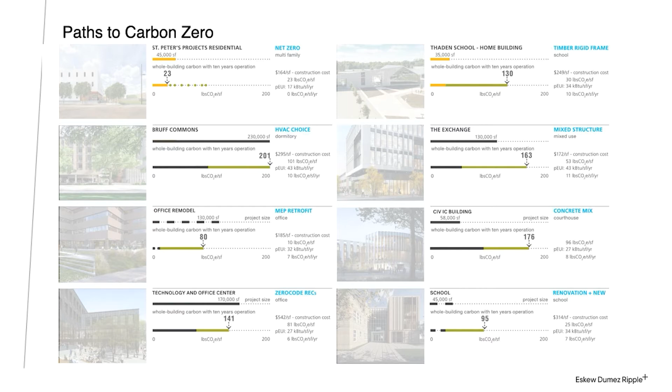So here at EskewDumezRipple, the Paths to Carbon Zero Research Fellowship had 2 tracks. One, measuring embodied carbon of a portfolio sample of our projects, and 2, seeing how much it would cost to meet the zero code standard in each of our projects. So we took a sample size representative of our portfolio of 8 projects across project types and locations and budgets to see what it would take to meet zero code and where we land on the embodied carbon scale.

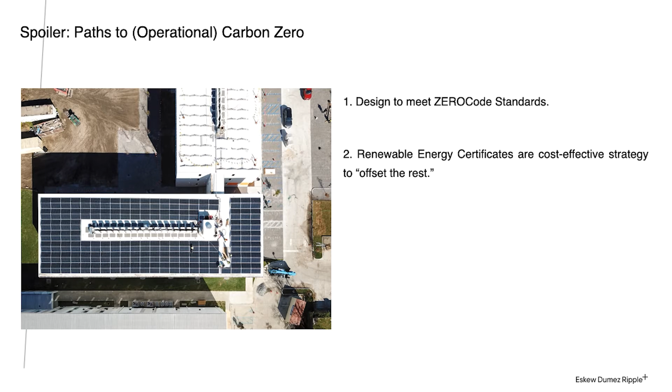Spoiler alert, meeting zero code standards was a pretty simple thing for us to achieve in design. And the second piece of zero code is offsetting the rest of your energy use. So that could be a solar installation for on-site power, or you could purchase renewable energy certificates. What we found is renewable energy certificates are what the market is ready for. From an embodied carbon standpoint, we kind of reinforced what we knew, that by picking your structural system, you can find significant reductions in embodied carbon.

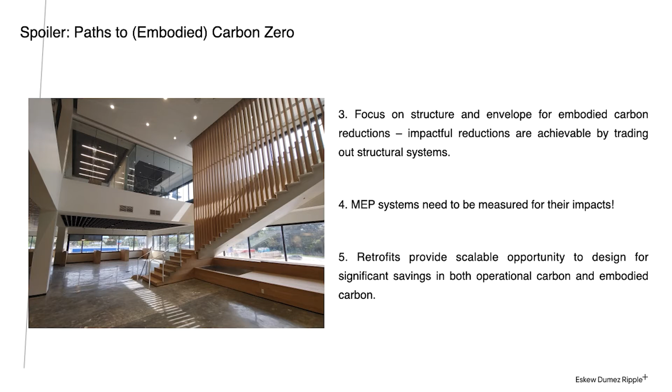And then we started to explore a little further at life cycle analyses and recognized that MEP systems need to and can be measured for their impacts, and that they can be pretty significant. And what we found within that study of MEP systems as well was that retrofits provide both savings in embodied carbon and operational carbon.

So in designing to zero code, the first step is designing to the ASHRAE standard 90.1-2016. And compared to a baseline average US building, what we found by designing to that standard across our projects as a firm-wide policy is we'll get about a 45% reduction in energy use intensity, which is great. But we wanted to know how much that cost. Clients tend to care about the dollar as well. So that translates to about a 60% savings in your annual energy bill just in designing a better, more efficient building. The next piece of zero code, though, is to offset that actual energy use through clean energy.

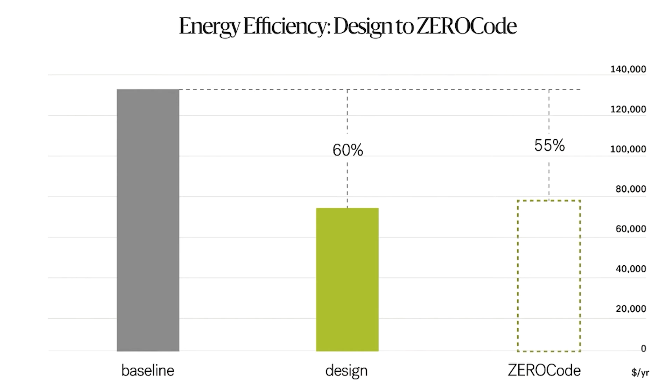And what we found is that comes at a very small price premium, about 5%. So you're still saving from a baseline building about 55% annually in your energy bill. Now, that premium is affordable in the context of purchasing renewable energy certificates, and it's about a 5% premium to your annual energy bill, which translates to about 5 cents per square foot on most of our projects. The other option is to buy the clean energy, buy the infrastructure, which is on-site solar and costs a little bit more. You're buying instead of renting. So $5 a square foot is what we found to be true.

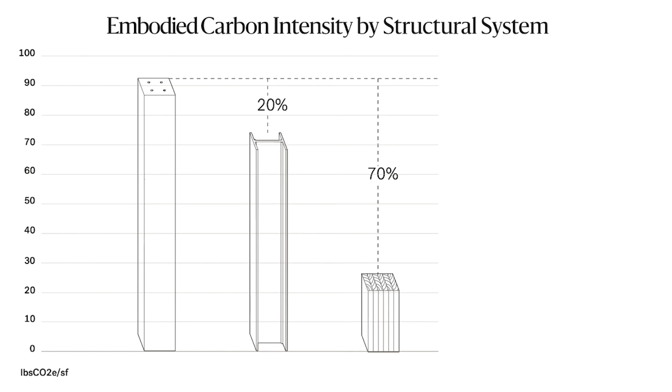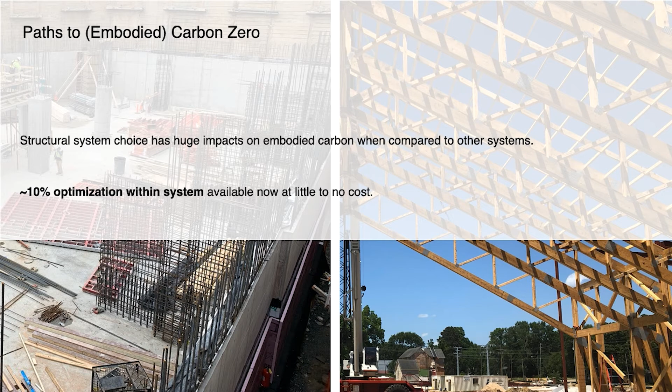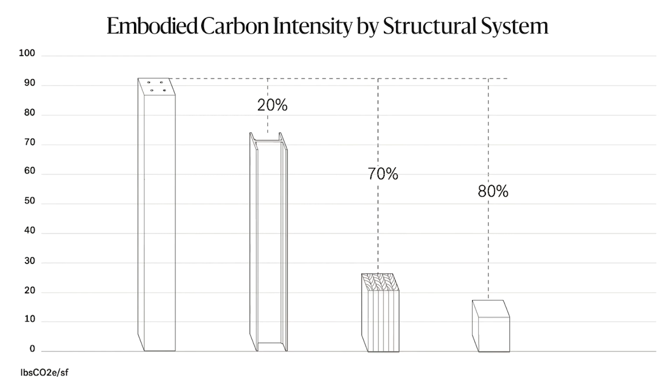The next piece we started to examine was sorting our projects by structural system and where we land in embodied carbon. No surprise, concrete was the heaviest and wood is the lightest. So if we're able to trade out from a concrete system to a wood system, we will find a significant embodied carbon savings just in choosing your structural system wisely. The other thing we found is that in concrete buildings specifically, you can still find a 10% optimization within the system at little to no cost, specifically by looking at fly ash mixtures. Our heavy hitter for embodied carbon savings is in the form of retrofits. That's where we found about an 80% savings compared to building a building new.

So we looked at a specific case study and found exactly that: an interior renovation came in at about 20% of what it would have taken to build the building new. But that retrofit came with MEP upgrades as well, so we wanted to measure those.

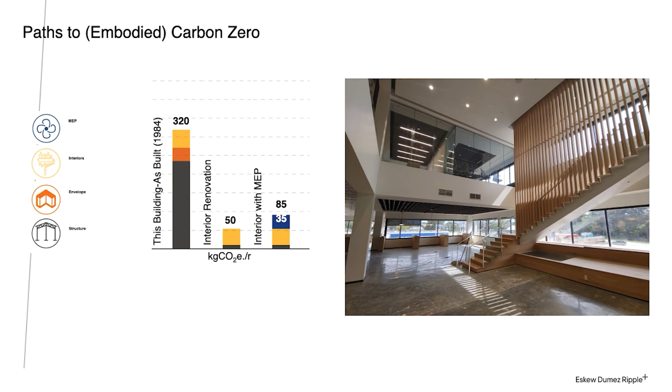And we found that MEP systems need to be measured, and especially in retrofits, can be about a 40% contribution to embodied carbon. But the thing with retrofits, especially MEP retrofits, is it addresses both embodied and operational carbon. And for this project, we found it's a 1-year carbon payback, including the MEP system in what you end up

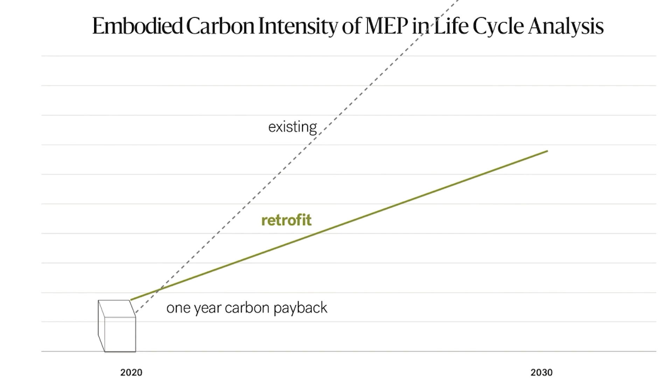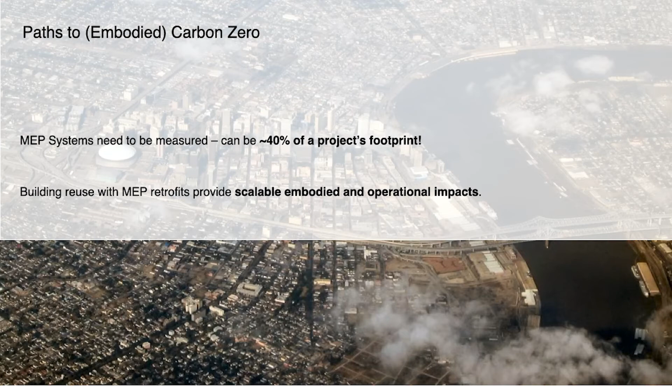saving in operational carbon. So while we need to measure MEP systems, that they can be 40% of a project's footprint, MEP retrofits provide scalable, impactful, embodied, and operational design decisions that we can execute now to meet the zero code. So in Paths to Carbon Zero, we found pretty simply it's affordable to meet the zero code standard and

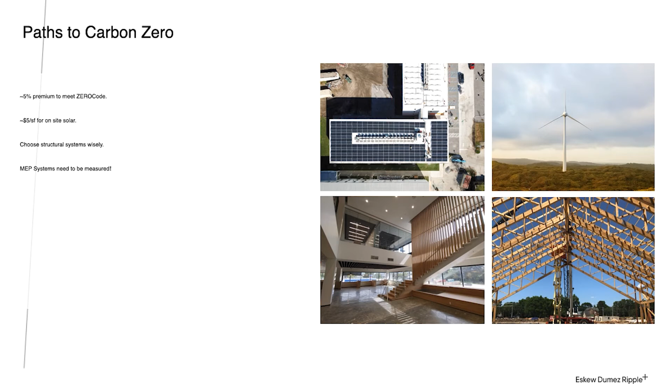be operationally carbon zero. The other piece we found is embodied carbon is a bit trickier, but by focusing on structural systems, we can get there. And don't forget to meet with your MEP team and start measuring your MEP systems. But the other takeaway is focusing on our structural choices. So what can we do with a good structure? What can we do with wood?

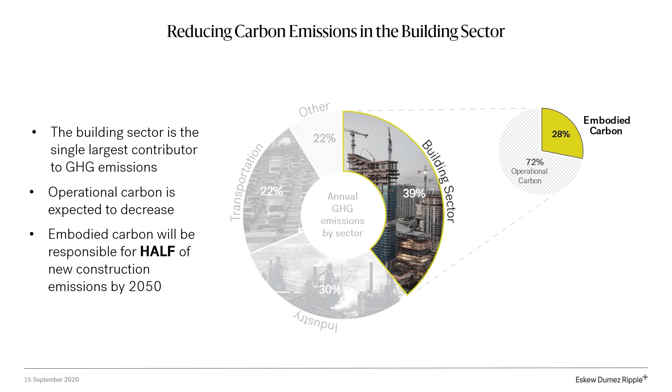When we look at projections in new construction between now and 2050, we see the critical role that embodied carbon plays. Structural systems in our buildings have been predominantly concrete and steel over the past century. And despite increasing efficiencies in their production processes, they remain significantly more energy intensive to produce in comparison to timber.

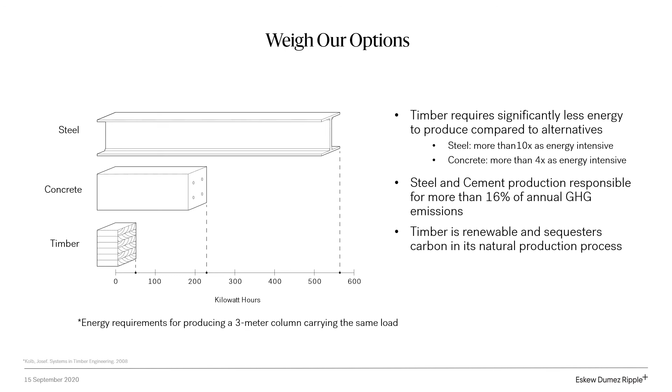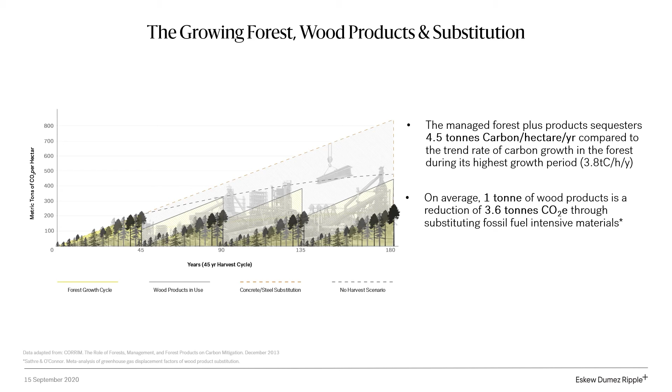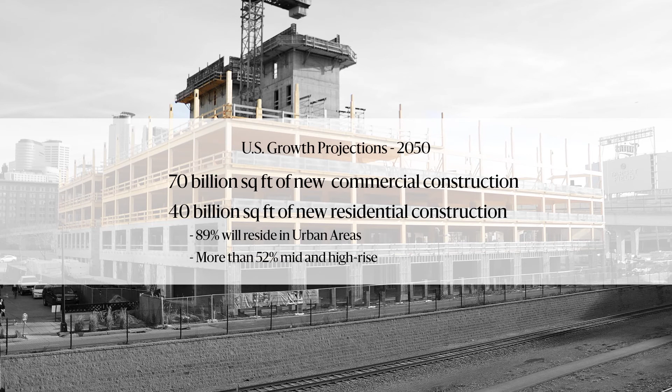By reducing our use of energy intensive construction materials, combined with the photosynthetic absorption of carbon dioxide in forest growth cycles and the sequestration of carbon bound up in harvested wood products, we start to see a compounding carbon benefit. So in researching what exactly this could mean at scale, we needed to identify several key factors, the first being the potential market for mass timber in the US in terms of residential and commercial construction.

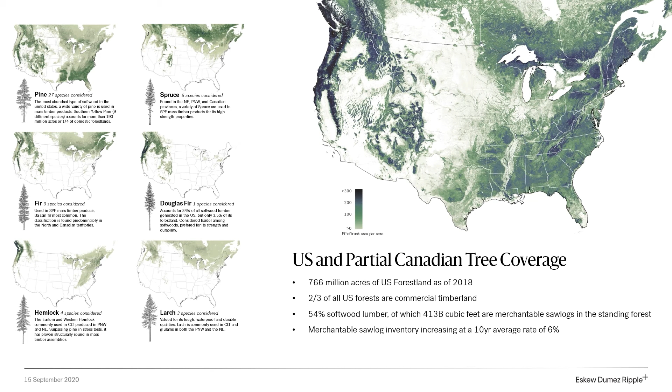The volume of timber needed to supply that potential market, while closely reviewing forestry data to determine the extent to which our forests could handle this sort of intervention. And while doing so, we also wanted to maintain the notion that the domestic softwood growing stock would continue to increase, given the rate at which it has been in the past 40 years.

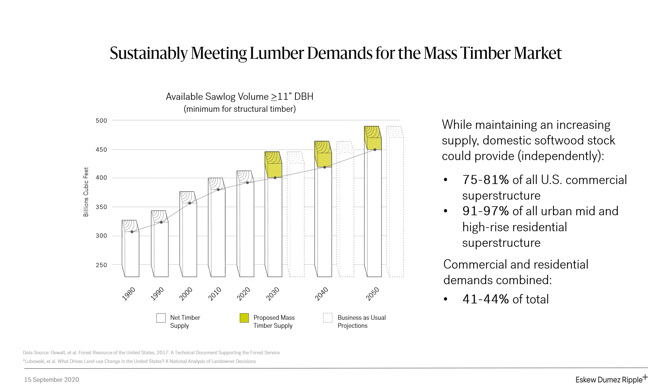And what we found: over the course of the next 30 years, this scenario could sequester as much as 1.5 gigatons of carbon dioxide through the timber itself, avoiding nearly 1.8 gigatons of carbon dioxide through using less concrete and steel, with an overall carbon benefit of 3.3 gigatons. A carbon impact like this could reduce global emissions specific to embodied carbon from the building sector by as much

as 3%. And while this study, in which mass timber is the deciding material for all commercial and a significant portion of residential projects, may seem improbable, architects need to start thinking at scale like this to make shifts in practice if we're at all serious about mitigating climate change.

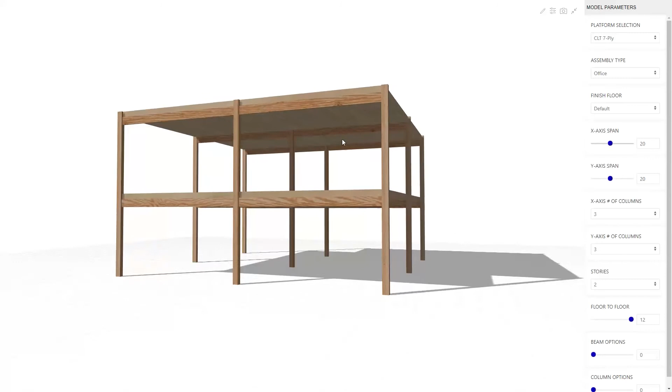We know that wood has the potential to play a major role in reducing the embodied carbon of our future structures. Now, this will require a significant shift from the conventional steel and concrete used today. For most architects, this will put us back at the bottom of the experience curve. The Midrise mass timber design tool aims to shorten that curve by providing architects with a design space for early design development where they can quickly iterate through ideas and understand the overall implications of their designs.

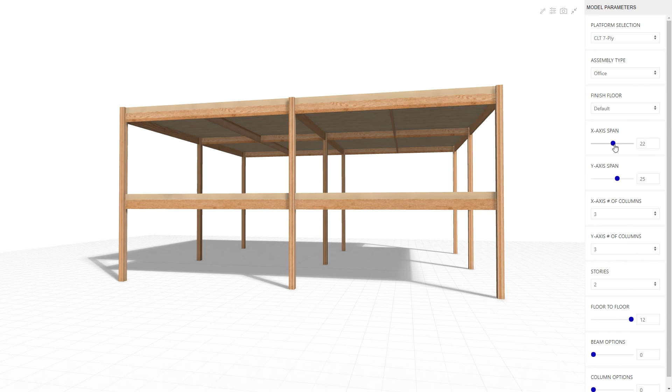The tool works by connecting a series of structural tables together that enable the model to generate a three-dimensional representation of that design. From there, adjusting the input parameters allows the user to see what happens when something is changed, such as the column span. The implications can then be understood by comparing the total material cost and total carbon sequestration between iterations.

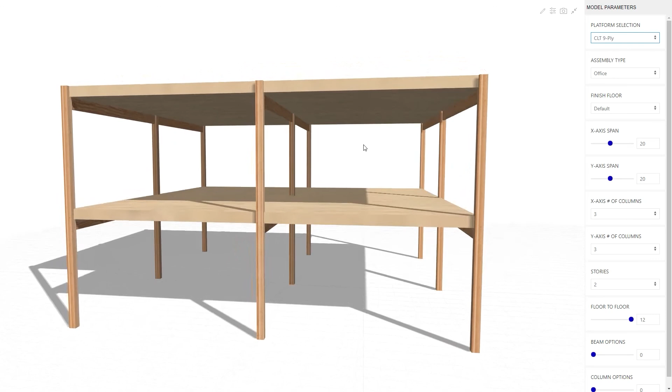An example is a model that utilizes a 20-foot by 20-foot column grid. Changing the platform input parameter between different plies of CLT would allow the user to quickly see the different beam depths and the number of beams required for each iteration. They could quickly determine if it was more efficient to use a thinner panel with more beams or a thicker panel with fewer beams. Ultimately, this tool is intended to help architects get more comfortable with mass timber at the beginning of the project rather than later down the road.

Now, we are fighting a global climate crisis, and the materials we use today will have a significant impact on what happens between now and in 30 years. So what we like to say at EDR is that our goal is to apply leading edge tools for trailing edge clients, for clients who might not necessarily be into the whizziest stuff. Sustainability might not be their number one priority.

But we'd like to find ways that by integrating that into everyday practice, making it practical, making it accessible, we can provide a model for firms across the country to transform architectural practice.